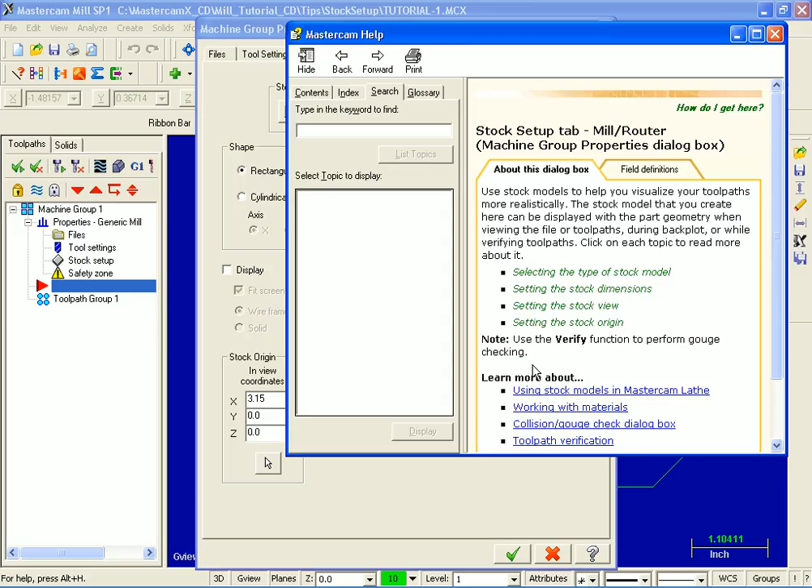Now, before we explore any of the fields in this page, what I'm going to do is move on down to the bottom right hand corner and click on the question mark. And here we are in Help. Now, for example, I can move over to the next page, Field Definitions, and here I'll find brief explanations of what these particular functions do.

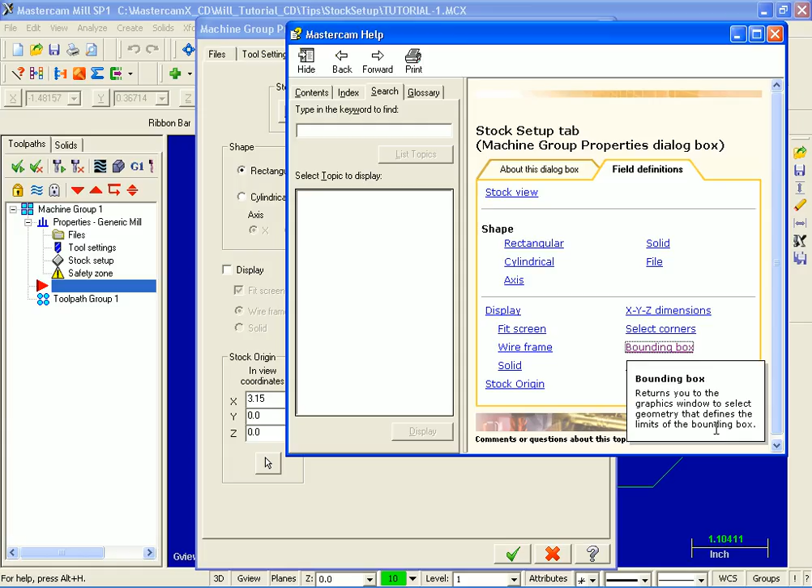For example, I've clicked on Bounding Box, and it returns you to the graphics window to select geometry that defines the limits of the bounding box. I'm going to minimize Help. Well, let's go and check out bounding box, and this will enable us to get Mastercam to figure out the size of the material. I'm going to click on bounding box.

Now, over on the left hand side in the bounding box dialog box, starting up at the top, we've got all entities checked. So as you can see in the screen, all our entities have been selected. Down below, what do we want to create? Well, we'd like to create the stock. I don't want to create any lines, arcs, points or center points. I'm going to leave these unchecked. So we're just creating stock.

Now, just below the create section, expand. In the X value, I'm going to change the expand in X to 0.2. I'm going to move on down to Y. I'm going to change that to 0.2 as well. So what I'm doing is expanding the stock size so it's 200 thou bigger than my finished geometry. Now the Z, I'm going to leave that at 0.

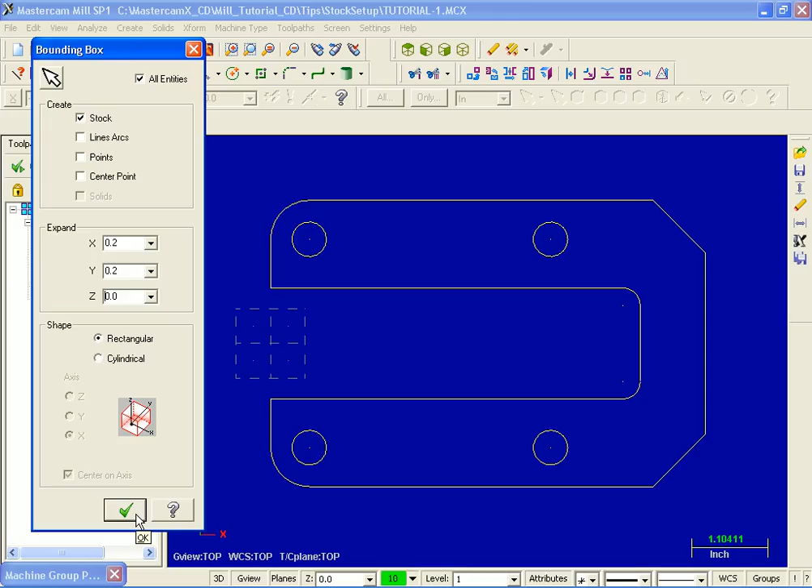Down below is shape. Now the material stock that we're creating is rectangular. So what I'm going to do is move on down. We're finished here, and I'm going to click on OK. Now, what Bounding Box has done is looked at the geometry for tutorial 1 and added 200 thou around the part. So the Y and X value, Mastercam figured that out from our geometry.

Now, over on the right, the Z, I'm going to input the thickness at 0.5. Now, moving over to the left, you can see I've got display turned on and also fit screen. Now, I'm going to go down to the bottom and hit OK. And as you can see, this red dashed line represents the stock we've just created.

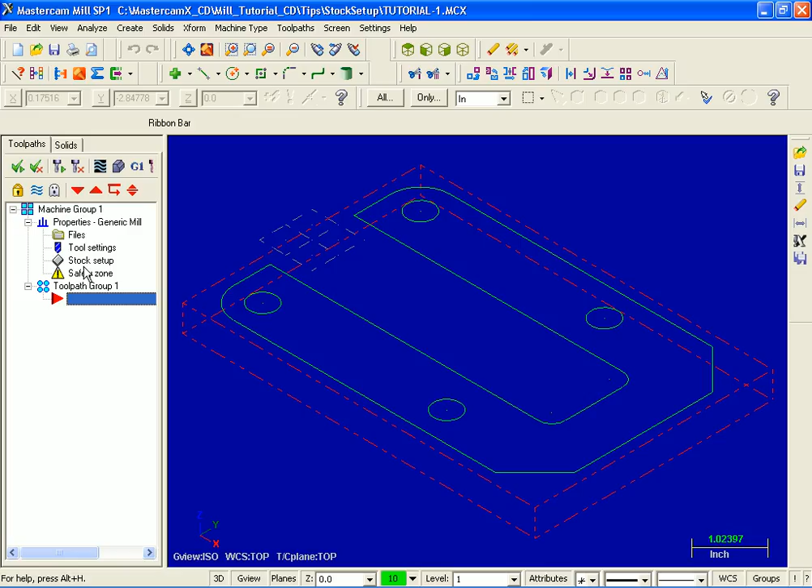Now, earlier on in the expand section, we expanded 0.2. So the distance from this red dashed line to the finished geometry is 200 thou all around. Let's move up to the toolbar and get an isometric view. I'm going to do a screen fit. And there's our stock, and it's 1/2 inch thick. Let's move on back to the left now, and let's go back into stock setup.

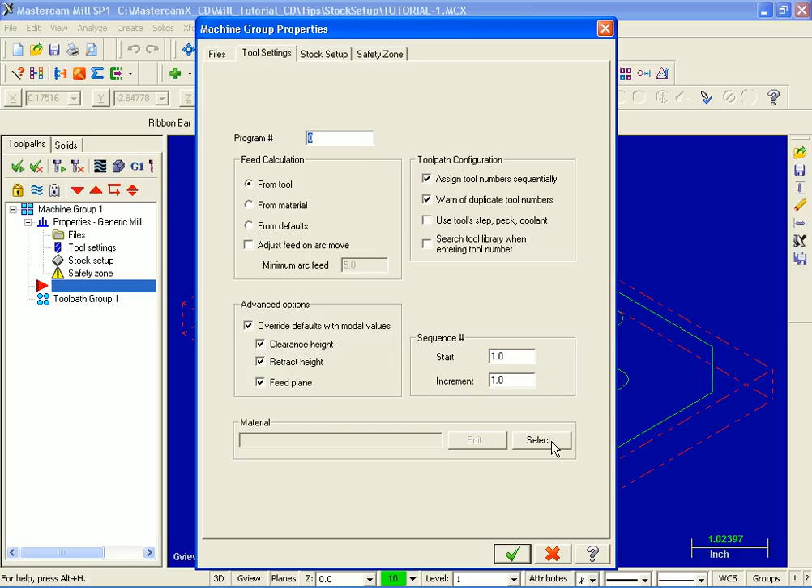What I'd like to do is set up the material. So I'm going to move over to Tool Settings. Now, at the very bottom in the Material section, we don't have any material identified. So I'm going to click on the Select button. Now, in this Material List dialog box, at the very bottom in the Source section, I'm going to open up this drop down and select Mill Library.

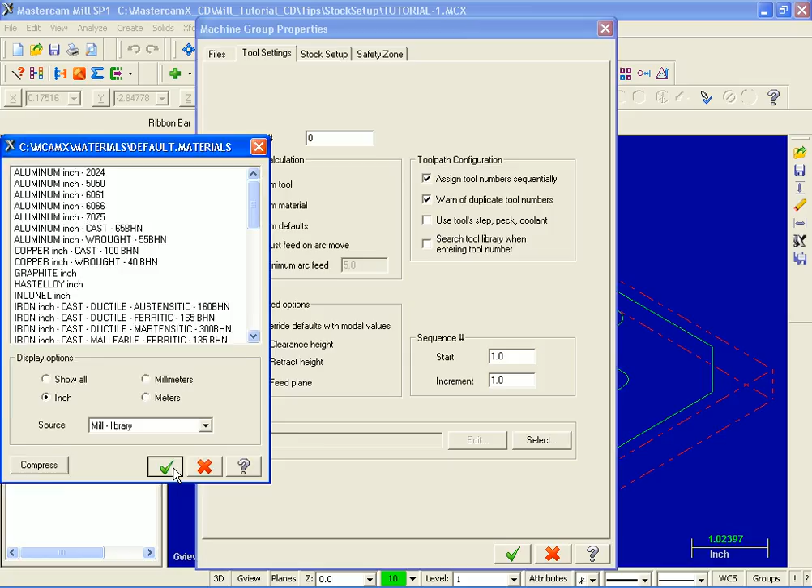Now, the material that we're using for tutorial 1 is aluminum inch 6061. I've selected it. I'm now going to go on down to the bottom and hit the green check mark for OK. Now just above in the feed calculation area you can see I have the radio button turned on from tool. This uses the feed rate, the plunge rate, retract and spindle speed directly from the tool definition.

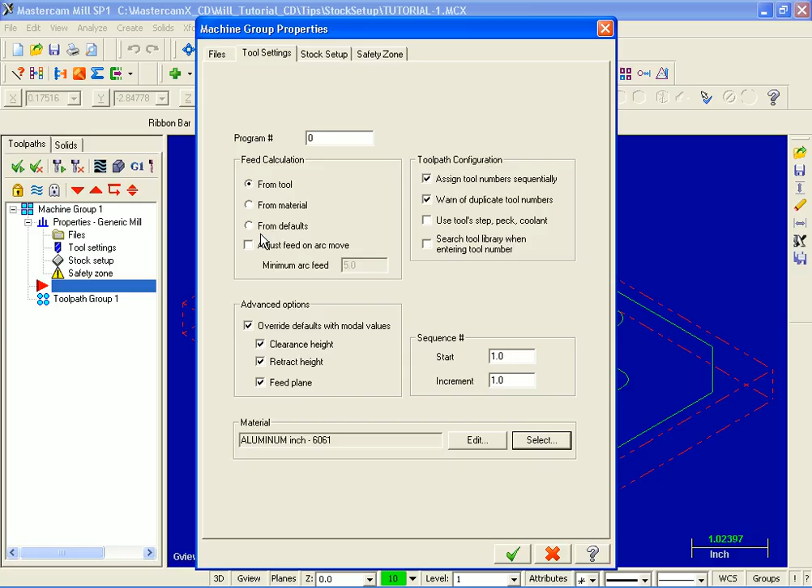Down below, from material calculates the feed rate, plunge rate, retract and spindle speed based on the type of stock material. Below that, from defaults uses the setting from the toolpath default files. Let's go back to the stock setup page.

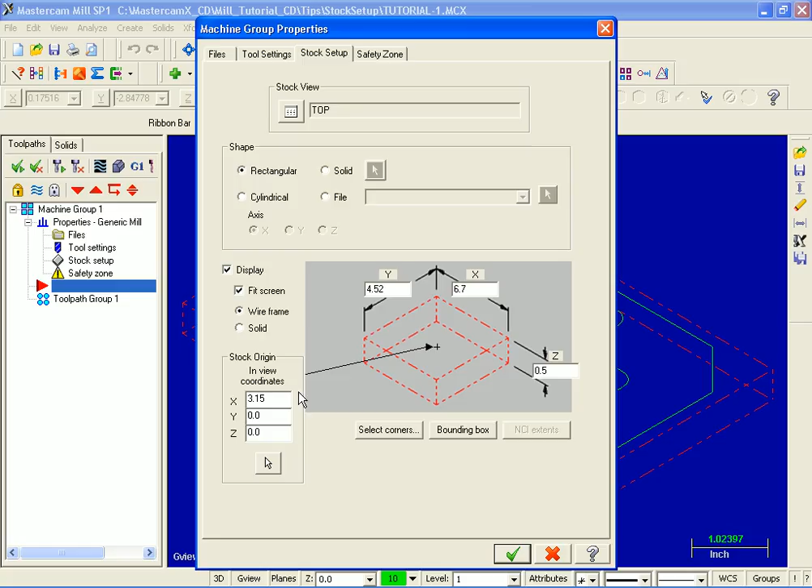Now let's look down in the lower left corner, stock origin, and as you can see the X value is set at X 3.15 with Y and Z at 0. So what we're saying is our stock origin is located here. Now what I'm going to do is pick a point up in this top left corner. I'm now going to pick OK, and let's see what happens to the position of our stock.

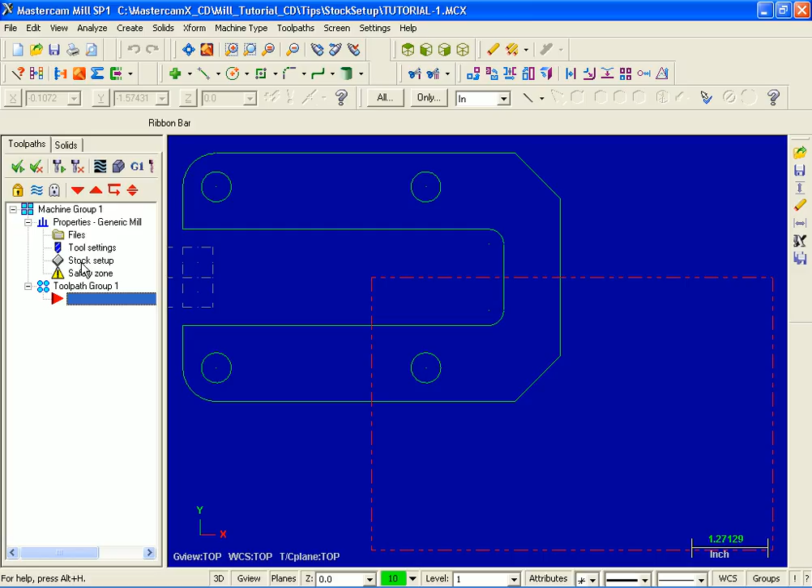Now I'm going to move up to the top and get a top view, and also just slide off to the left and do a screen fit. Now as you can see we picked this top left corner for the stock setup. So what we're saying is that the stock origin, this corner, is at X 3.15. Now it's totally off out in right field, so let's go back into stock setup and set it back up again in its correct position.

What I'm going to do is just pick over here and pick OK, do a screen fit, and there's our stock correctly positioned. Now that completes our video on stock setup.